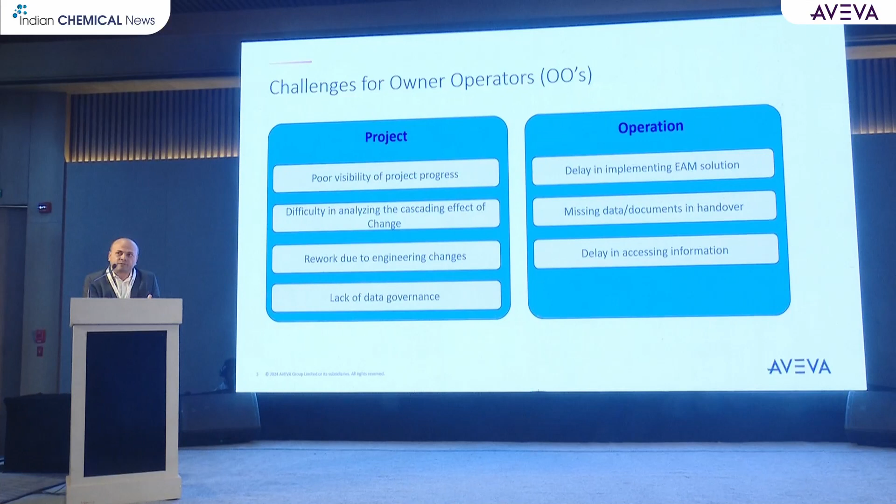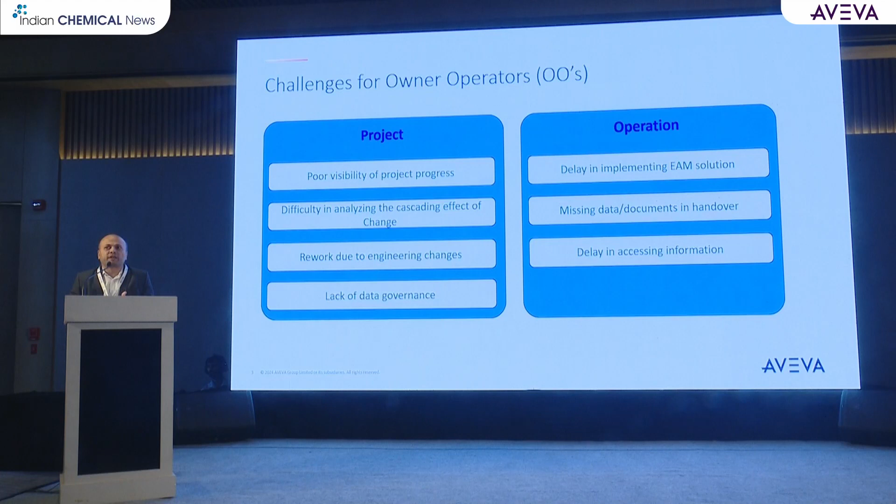When we get this handover and start operating the plant, we face another type of challenge. When we start the operation, first we have to keep our operation and maintenance systems up. For that we need to feed a lot of information we are getting from the EPCs or PMCs, like assets, their names, attributes, so that we can do maintenance and operation efficiently. Traditionally this used to happen through Excel or manual entry, and this also takes a lot of time and effort.

Another important thing is missing data or documents in handover. As I mentioned, we are getting this data in trucks or in hard copies, and it is quite impossible to ensure that all the data are complete. When we get into maintenance or any shutdown activity, we realize that some P&IDs are not the latest or some operational or design parameters are missing, and we need to depend on the EPCs or the OEMs to get this information.

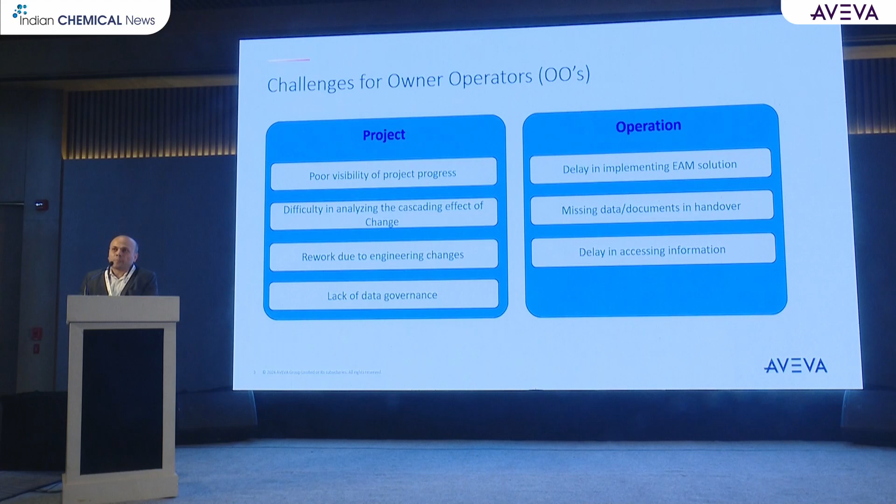Last, delay in accessing the information. We are using different digital applications, but those are in silos. Let us say if I have to generate a work order. So these are the major challenges which we are facing as an owner-operator during the project as well as operation phase. We'll see how we can solve these challenges in this session.

So what should be the solution? What should be the vision for the owner-operator? The owner-operator should have a web portal which is kind of a search engine of your plant, where for any specific asset or tag, you should be able to access all the information which is coming from different silos. It can be a 3D model, an engineering document, predictive information, or an OEM document.

So all these various data silos coming from different sources should be accessible quickly through a portal, in the context of a tag, without having any high-end application installed. If we have this kind of solution, it empowers our workforce and helps them take decisions quickly.

So if I broadly categorize this into two categories: first is the existing plant, where we have seen that some plants are very old, 15, 20 years old. And second is the ongoing project or upcoming plant. We have also seen that a lot of expansions are happening. So how can we handle this for the upcoming plant?

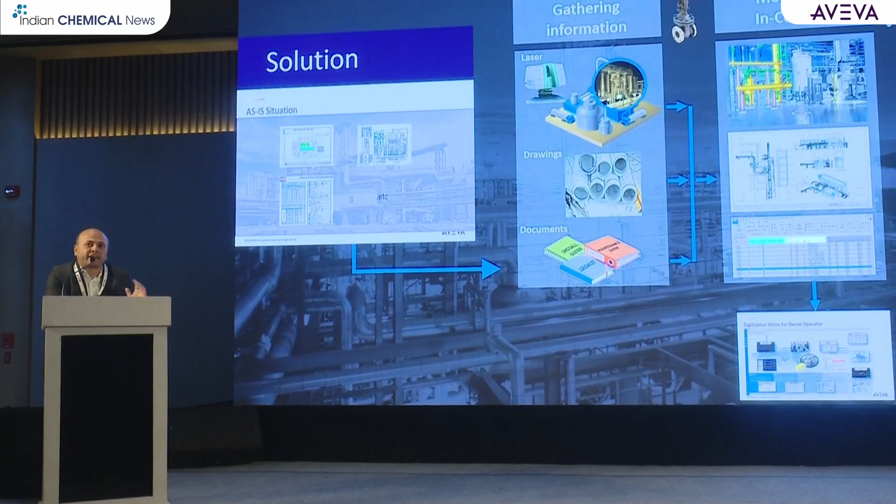So if I have to achieve this milestone, I have to take different steps. My first step will be gathering the information, second step is creating the intelligent model, and third step is building the digital twin. So now the first step, how we can gather the information. For that, first we need to do the laser scan. To do the laser scan, we need to identify the different locations from where I am going to do the laser scanning, so that I can capture all the areas of my plant.

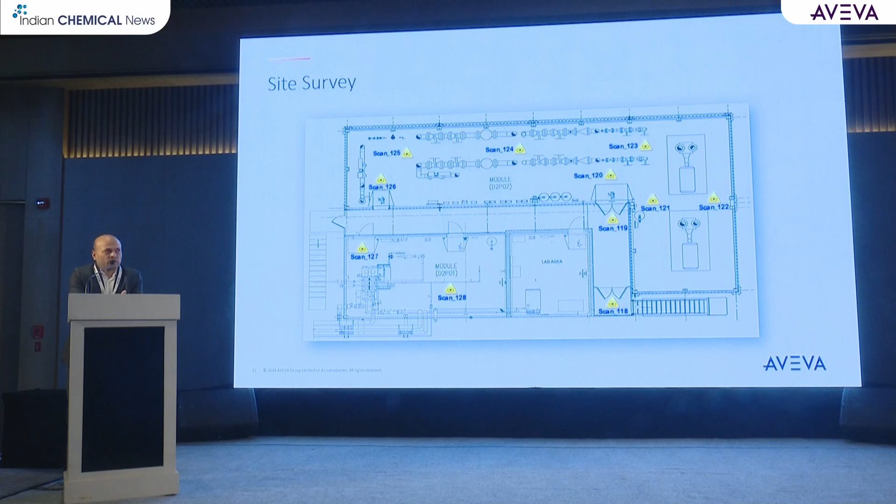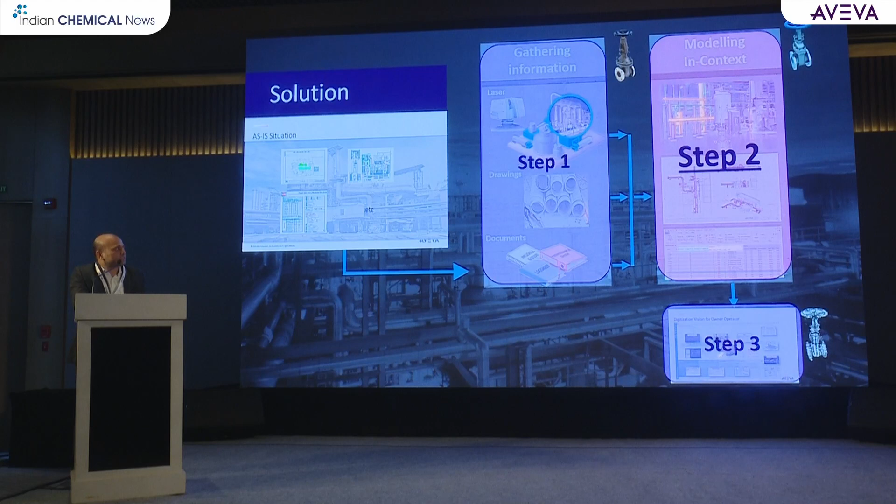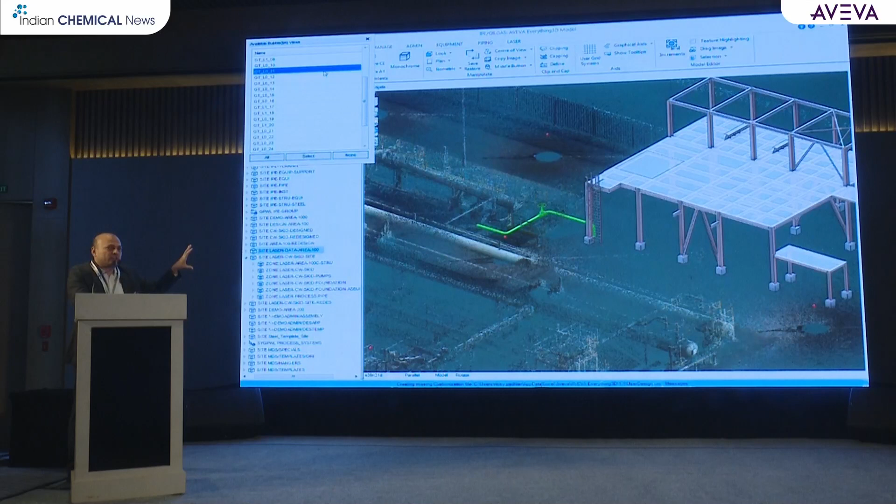Once I do the laser scan, what will I get? I will get the point cloud data, and I will also get the panoramic bubble view, a panoramic image of my plant. This information basically gives me the as-is condition of the plant. Now the next step is, with these engineering documents and the as-is condition, we can take this laser data into the 3D modeling application. Here you can see all the point cloud data coming from my laser scanner, I can visualize it. I can see the different scanning locations from where those scans were done.

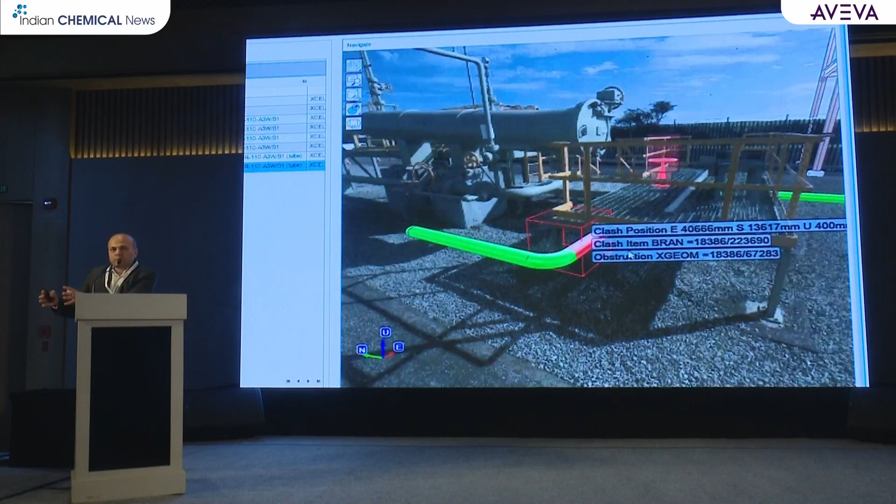I can go to a specific scan and see the panoramic image of my plant. So basically I don't have to go on site, I can directly see my as-is condition sitting in the office. And this is very useful even when we are doing expansion. Sometimes when we are scaling up and doing the expansion, we are involving the EPC, and the EPC doesn't have information about the existing condition of the plant. And we have to ensure that the additional equipment I am adding is clash free and has sufficient maintenance space. All this activity I can do once I have this laser data inside the 3D environment.

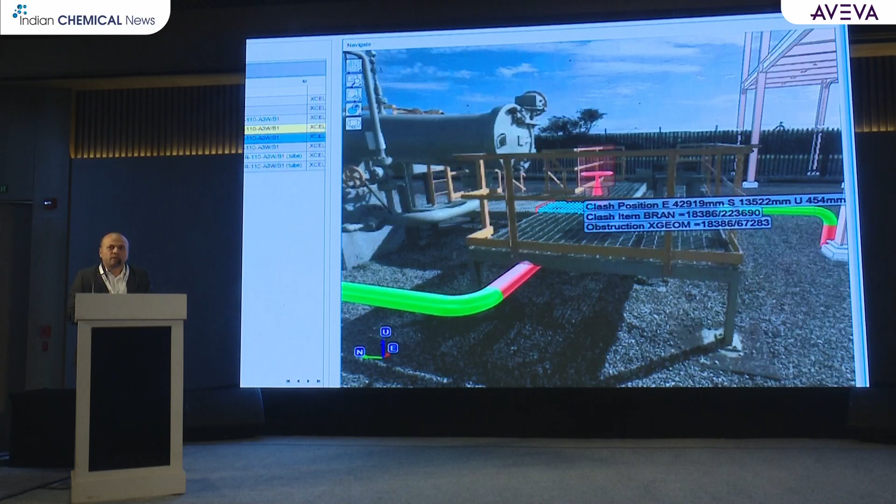Then what I can do further, I can go and create the 3D model. Either I can create the complete 3D model of my as-built plant, or I can create the partial 3D model for the area where I am going to do the expansion. So here you can see some intelligent 3D model, and I can also see the laser data of my existing site condition.

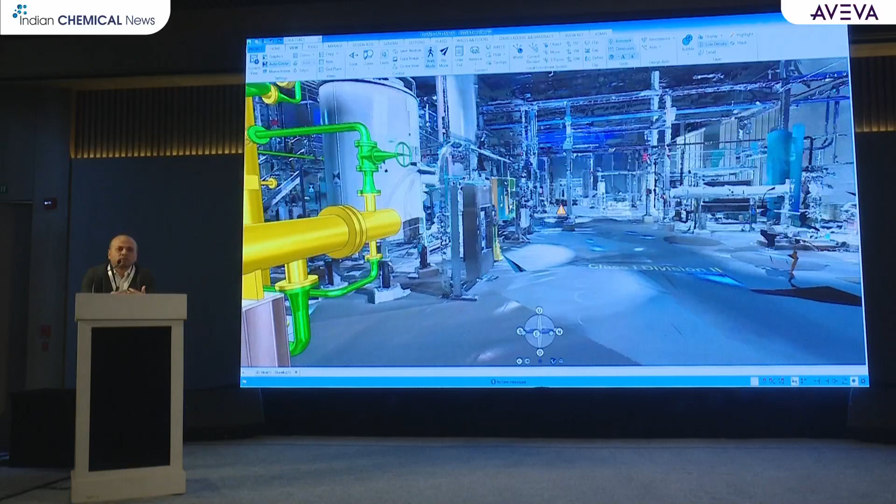Now when we do the expansion, sometimes we are replacing major equipment also. So here, in the AVEVA E3D Design application, I can bring in laser data, visualize it, create the additional 3D model, and see it in a combined view. Not only that, if I am going to replace any equipment, I can select a small area of the laser data.

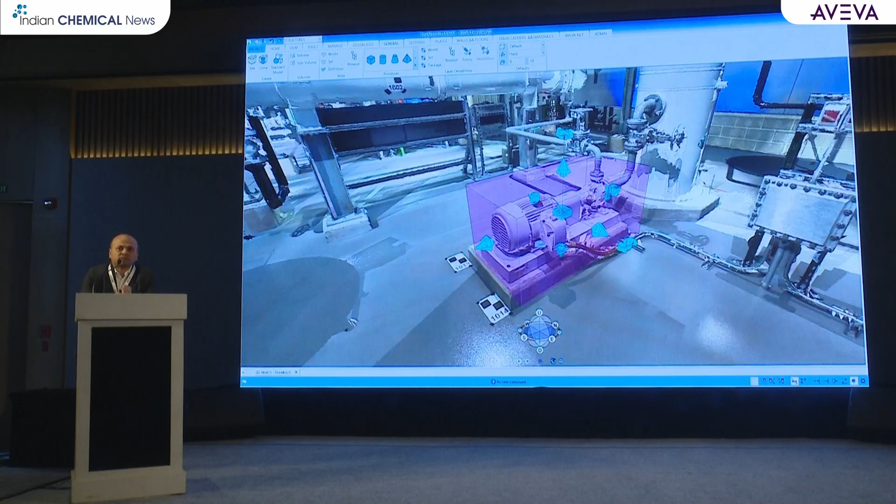Let us say if it is a pump, I am replacing this pump. I can select area, I can create a boundary around the pump, and then I can demolish that laser scan, so that from that area laser scan will be removed, and I can place a new equipment in that place, I can route the necessary pipe, and I can make the connection. So these are the various ways I can leverage my as-is condition of the plant, and I can use it for the expansion.

Here we also have discussed about the safety. So it has a lot of benefit because the person doesn't have to go on site. He is not exposing himself to the plant which is in operation. So everything can be done with high accuracy sitting in the office. And the accuracy of the laser scan data can be plus or minus 1 mm.

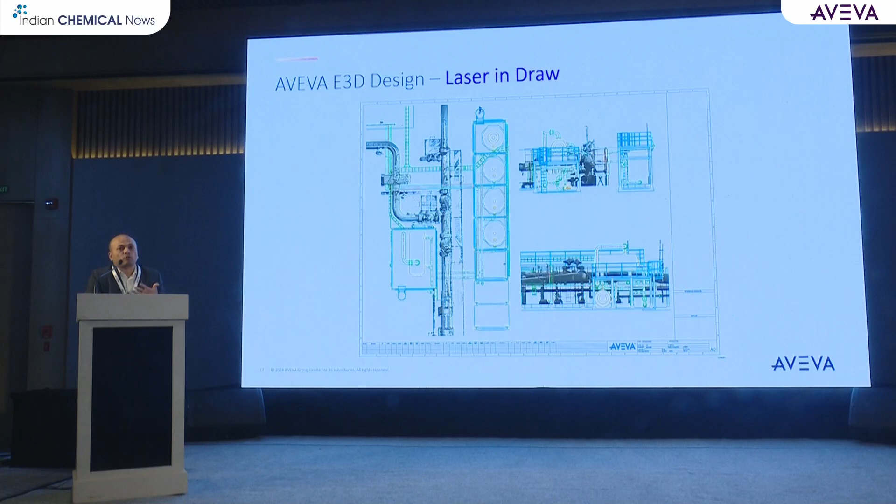So practically if these things are being done manually, then there is always a chance that my measurements are not accurate. When I generate the drawings, it ends up in clashing on site, it ends up in the rework. But with this, I am ensuring that my BOM is accurate, all the drawings are accurate, which are not ending up in any rework in the construction.

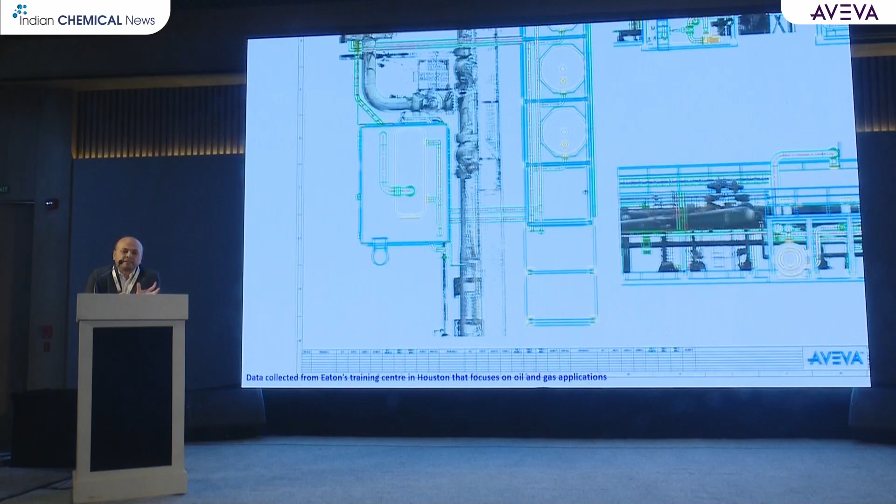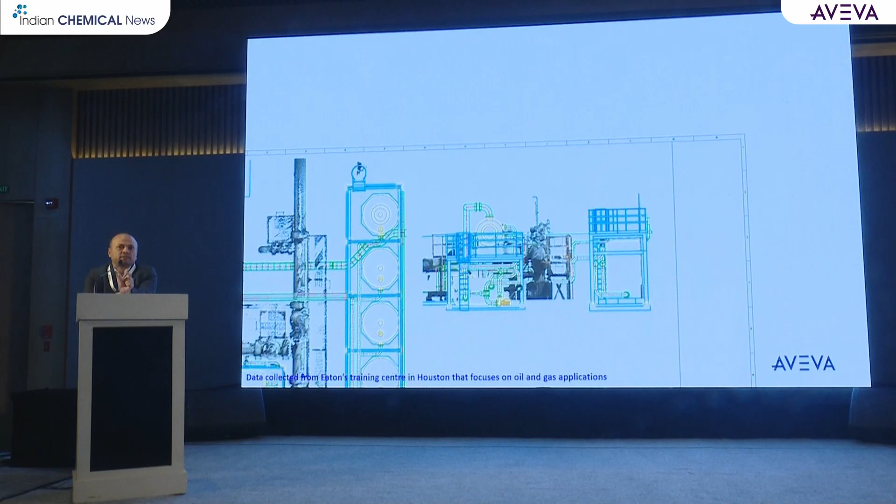Further, I can use this laser data while creating the drawing. So I am creating the intelligent model for which I want to do the expansion. I am also embedding it with the laser data so that I can do the measurement with my as-is condition of the site and the new equipment which are coming as a part of expansion. So even I can generate the drawings with the laser data.

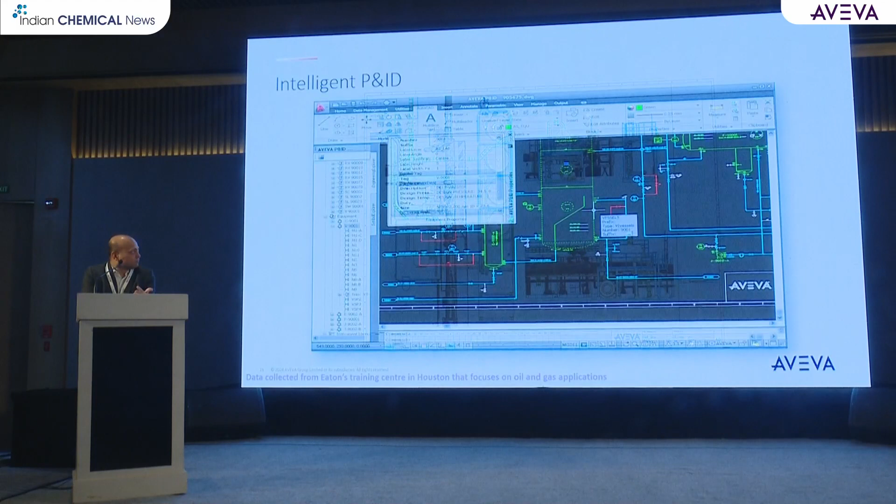Now P&ID. Normally we have the P&ID in AutoCAD or PDF. So here with AVEVA P&ID we can create intelligent P&ID. This P&ID helps us to create or extract the bill of material and to validate the P&ID. If somebody is, let us say, connecting the 100 NB pipe with the equipment's nozzle of 150 NB, then system will throw error that there is a connection error. But such kind of things we cannot check when we are using AutoCAD or PDF P&ID.

Now another important advantage of intelligent P&ID and intelligent 3D model is integrating P&ID and 3D model. Normally what we do, we update P&ID and then I do the manual checking that my 3D model is as per the P&ID. But with this intelligent P&ID, I can ensure that my 3D model is as per the P&ID, all the tagging, all the specification, piping specification, valve specification are as per the P&ID, and we can avoid the manual checking. We can avoid any rework which happens if we miss such kind of points while manual checking.

So what you are seeing is I am updating my 3D model based on the P&ID, and there is a difference in name of the valve tag which is there in the P&ID but not there in the 3D model. So I am updating my 3D model based on the P&ID. So similarly, it's not limited to P&ID and 3D model. We can also create the intelligent solution for the electrical and instrumentation, where we are creating SLDs, hookup drawings, termination drawings intelligently, and everything is integrated.

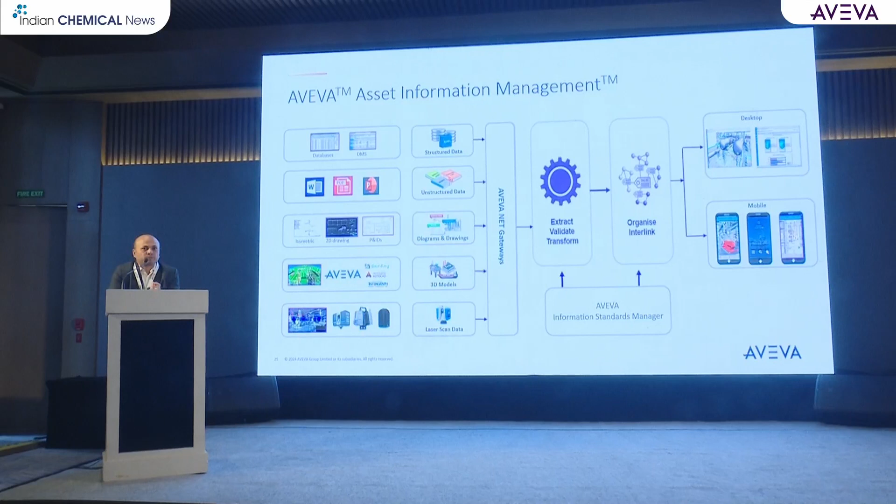the information about tag to tag, tag to document, all the network of information residing in my engineering warehouse. And as we have seen earlier, all this information can be accessed through browser. So we don't need any authoring application. Whatever different types of data we are seeing, we can bring all the different types of information in context of a tag, and we can visualize them on the browser. We don't need any authoring application.

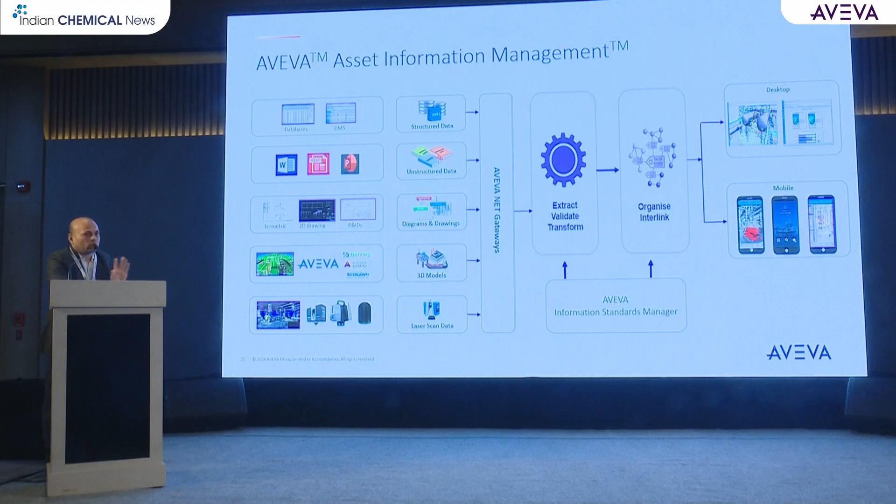And further, we can add additional data sources which are coming from the operation side also. So various operation and maintenance applications can be integrated. We can integrate the operational data, and then it becomes my true digital twin, which is a digital replica of my physical asset. So this is about how I can use it for my existing asset. Now let us understand it with a practical use case.

Let us say on site there is an alert coming on a pump, and our maintenance team has to generate the right deliverables. They have to provide it so that rectification can be done on site. Practically we know that this takes a lot of time to access various information residing in different silos. But when we have this digital twin in place, we can efficiently access the information and start the action. The maintenance team receives an email from PI Vision notifying them of an anomaly.

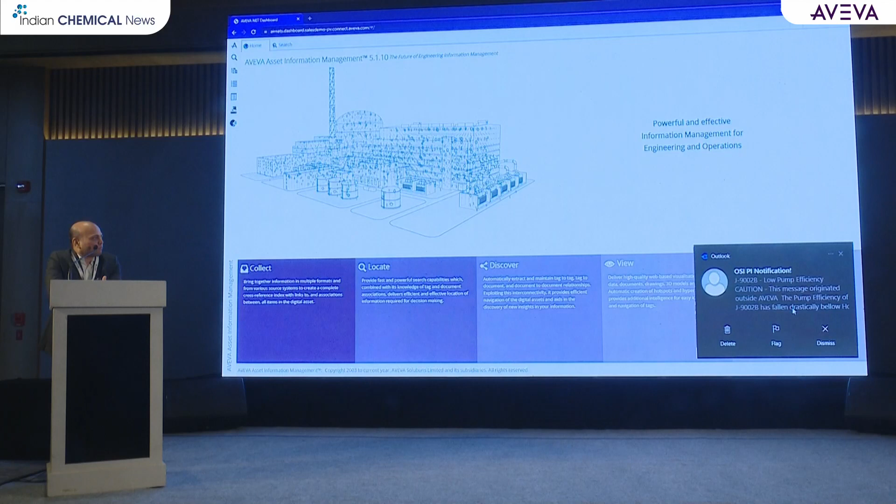The maintenance planner opens up the email to understand more about the notification generated. The email indicates that pump J9002B's efficiency is running low and has fallen below the hourly average efficiency of 71.87%. The notification email has the exact date and time data on the occurrence of the event and also shows the current conditions of pump J9002B. A pump overview hyperlink is also available in the email, which allows the user to navigate directly to PI Vision.

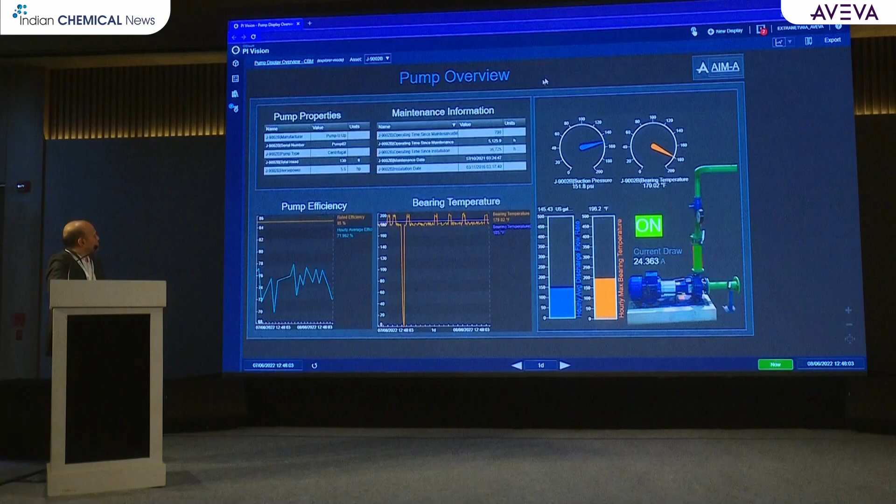Once in PI Vision, the maintenance planner can view the pump's basic data, such as its properties and maintenance information. Below we have graphs plotting real-time sensor data coming in from the field. A sharp decrease in pump efficiency is clearly visible on the graph. Drilling down on the pump efficiency graph allows for further investigation into the efficiency loss of the pump.

Switching between different time frames allows the maintenance team to view historical trends and observe changes in temperature and other operational data noticed during the same time intervals as the sharp decrease in pump efficiency. Plot lines differentiated by different colors represent rated and hourly average data. Clicking any point on the graph gives the maintenance team the exact date and time information of when the loss

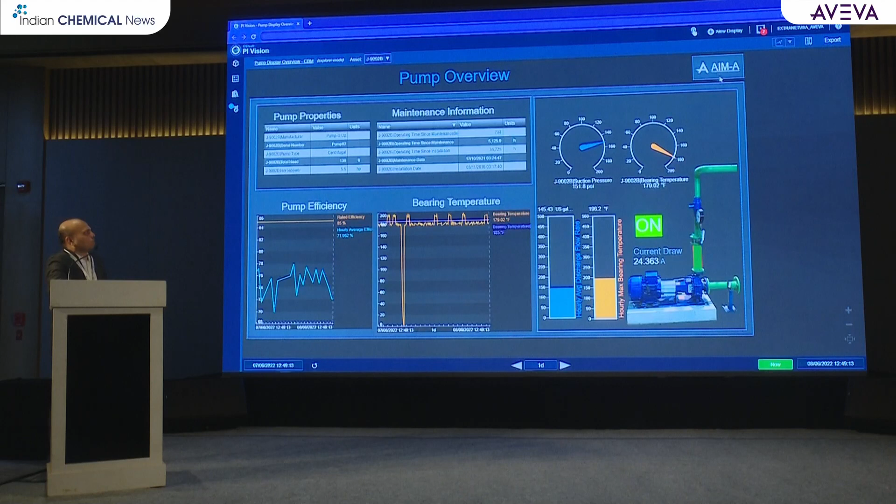in efficiency occurred. While the maintenance managers and planners have all the relevant operational data associated to this pump available on this screen, they need further master data and document information to find out the root cause for the constant drops in pump efficiency. To get to the bottom of this, the maintenance planner navigates to AVEVA's Asset Information Management solution that brings up the tag summary page for the pump. Here the maintenance teams can view all the metadata of the pump along with just the right operational and commissioning

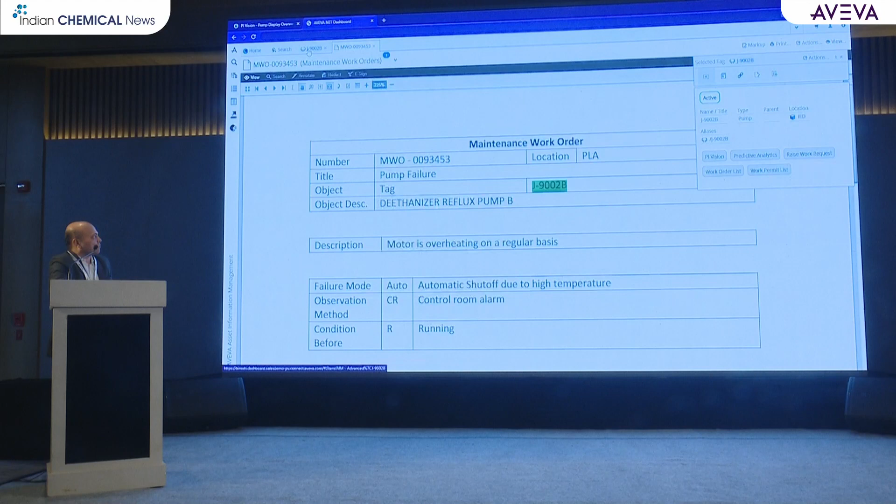data. Over at the Documents section, the maintenance and operations teams can view active or past work orders. Opening up Work Order 93453 shows vital information on the history of the pump. Now that we know the motor has been experiencing overheating issues in the past, let's take a look at any incidents that have taken place during previous maintenance tasks and activities. The incident report shows that there has been seal failure in the past, resulting in liquid spillage. All the required information about that past job and its resultant activities are available for the maintenance team to review

and prevent future incidents. The Parts and Components section shows all the parts that comprise the pump casing, and can also indicate replacement parts or any special equipment needed for maintenance work. With all this information, it is clear to the planner that an inspection is needed on the pump.

The maintenance planner opens up the risk assessment report to view all potential hazards of the job. The hazards and risks associated with maintenance activities for the asset, along with existing controls in place to mitigate these risks, are all available in this document. The maintenance planner now navigates back to the tag summary page to access the P&ID diagram of the plant.

The P&ID shows the process flow surrounding the pump J9002B and depicts vital information of other surrounding assets and valves that have a direct effect on the maintenance plans of the pump. Markup information on the top right shows that maintenance engineer Jim has an upcoming maintenance activity planned on assets near the pump. The maintenance planner uses the markup functionality to give maintenance engineers and technicians a heads up about previous incidents that have transpired in the area and directs them to Incident Report INC 002.

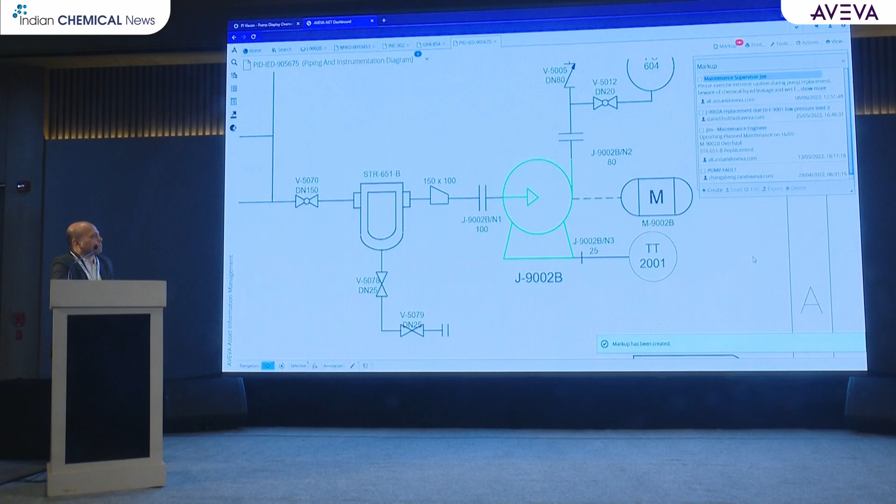AVEVA Asset Information Management allows the maintenance teams to view and access the plant's 3D model. This helps the maintenance planner visualize the area and plan and create work packages better. The maintenance planner can plot points within the 3D model to calculate distances and measurements of the site to ensure technicians have the right space to execute their work orders.

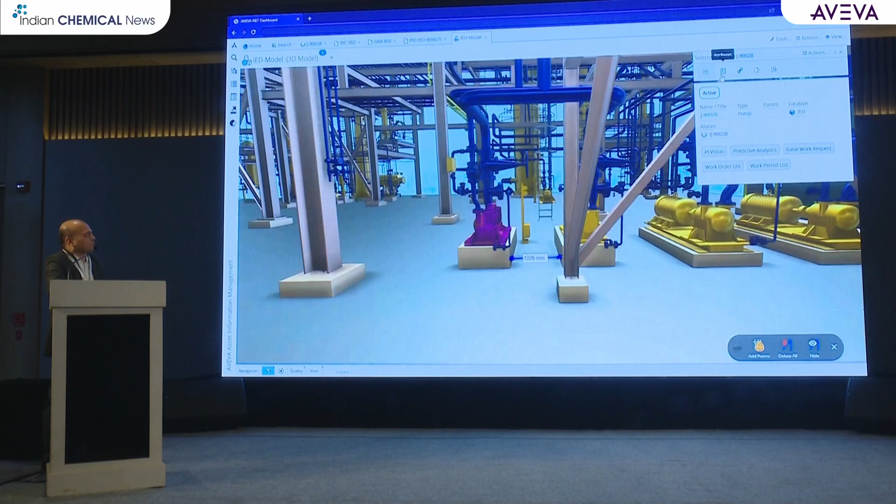While the maintenance teams are busy planning and creating work packages in AIM, they can also view real-time pump data, and can fairly quickly access operational data and bring up the pump efficiency graph from PI Vision as an external view, thus bringing together operational and engineering data, all in a single screen to make real-time data-driven decisions that in turn equip maintenance technicians and engineers with accurate information to help them do their jobs more efficiently.

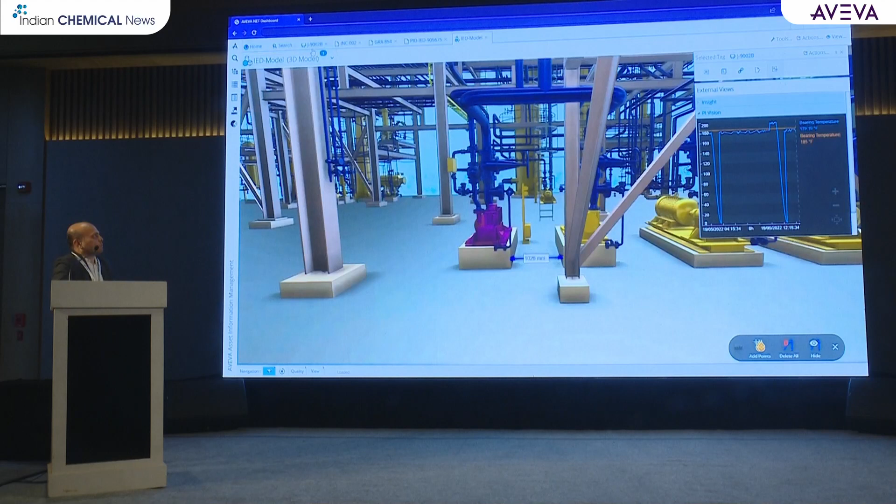Now that the planner has reviewed all the data, it's time to package it all up and send it out to the team in the field. The maintenance planner simply adds all the documents to their basket and reviews it one last time before exporting it into a work package.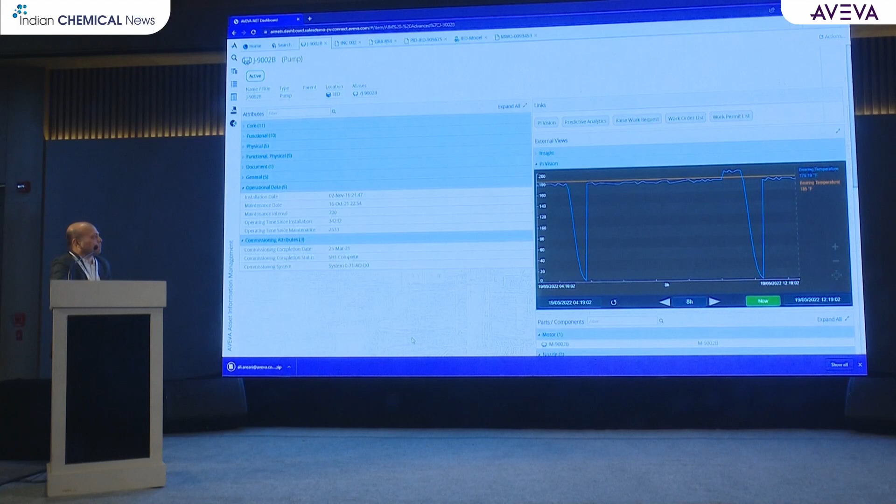Yeah. So practically, if this activity has to be carried out in our present scenario, we take a lot of time to gather the information, to identify the right documents which are specific to that particular pump. Now with this digital replica of the physical asset, we can get all the information in context of that particular tag within a very short time. And this saves a lot of time, or unproductive time I would say, of the plant person. Now, this was about the first category.

Second category is about the upcoming plants, or the ongoing projects. Now in that, it is very important, and nowadays there is a tradition that this digital handover is being asked at contract phase itself. So when you are placing the contract on the EPC or PMC, you should ensure that you are asking for the digital handover with all the native database, so that you don't have to do the laser scanning and you don't have to build the digital asset, because all the EPCs are using the tool to create this digital 3D model. So that can be leveraged by the owner operator by asking them in the contract phase itself.

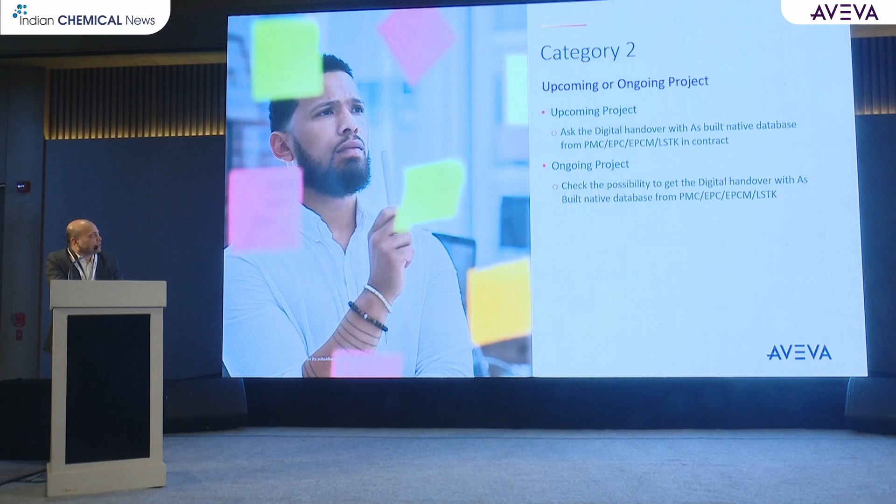So in that scenario, normally what happens is that all the EPCs are using this engineering tool in an integrated way. So that helps you as an owner operator to ensure that your projects are getting executed efficiently. EPCs are managing the changes in the engineering efficiently, and ultimately money saved by the EPC is getting translated to the owner operator. So these are all the different authoring applications which can be leveraged in an integrated way.

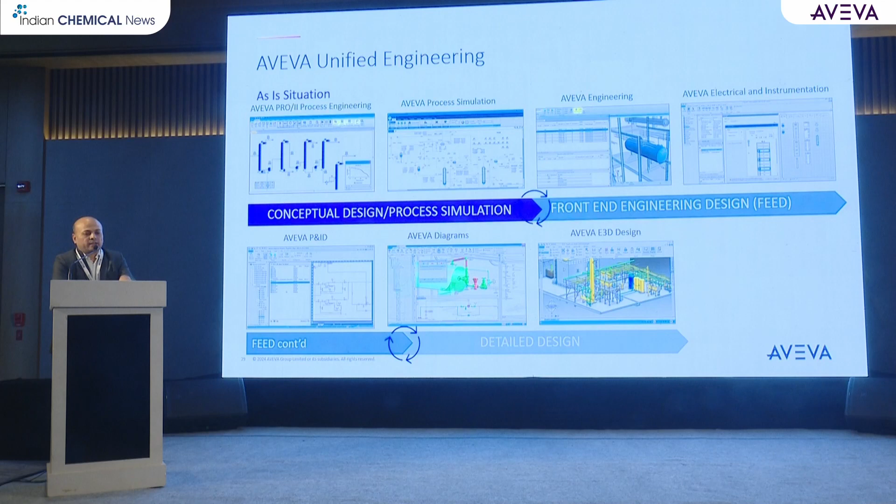The solution is unified engineering. It starts from the process simulation and engineering, electrical, instrumentation, P&ID and 3D modeling. So this covers the complete design phase of the project. Starting from my concept design where I do the steady state and dynamic simulation. Then I get into the FEED stage where I generate the PFDs. Then I get into the detailed design, which gives the input for my procurement and construction.

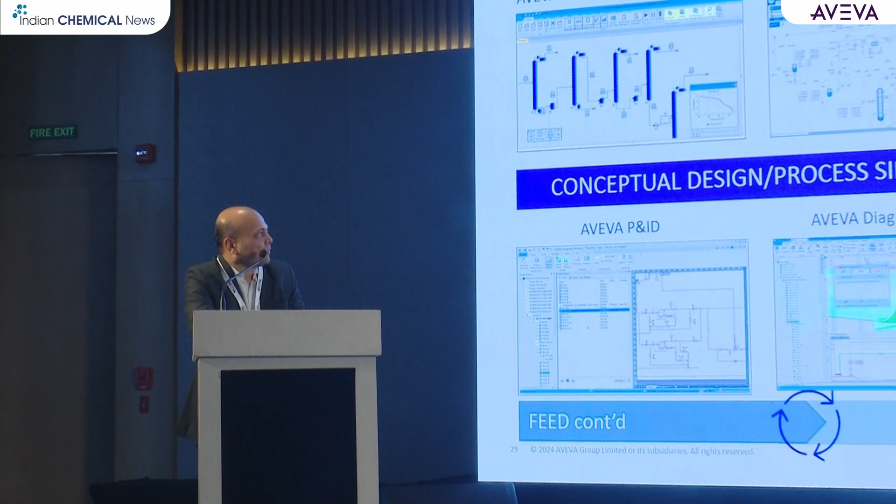Now further, when I am using this intelligent engineering tool in the project phase, I can use this digital twin for project progress monitoring. So as I mentioned, this is an application agnostic tool. So it can take the data from the engineering application, it can take the data from the project execution application, like material management or Primavera for project planning or construction management. All the information can be pushed into the digital twin solution.

In the project phase, we can call it a project monitoring and data governance platform. So here you can slice and dice the data, you can build various KPIs and you can monitor the project progress through the dashboard.